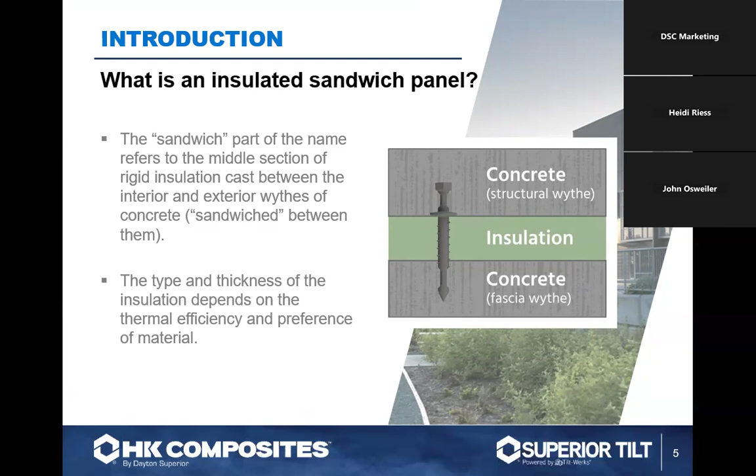So when we talk about sandwich panel, we're talking about two layers of concrete. We call them wythes, with insulation in the middle. What's important is that we make that efficient, getting every benefit we can out of it, wringing every economy we can. So the thickness of insulation varies depending on the facility type and what we're doing in there, as well as the actual makeup of the panel itself.

There's really two primary materials in a sandwich panel. There's a few more than that, but there's really two main ones: concrete and insulation. There are no cavities within this wall. This is not a cavity wall system in any way. There is reinforcement in that panel - there's rebar, there may be some wire mesh depending on the panel type. But again, no cavities. This can be a completely finished, efficient, complete panel, even without any coatings.

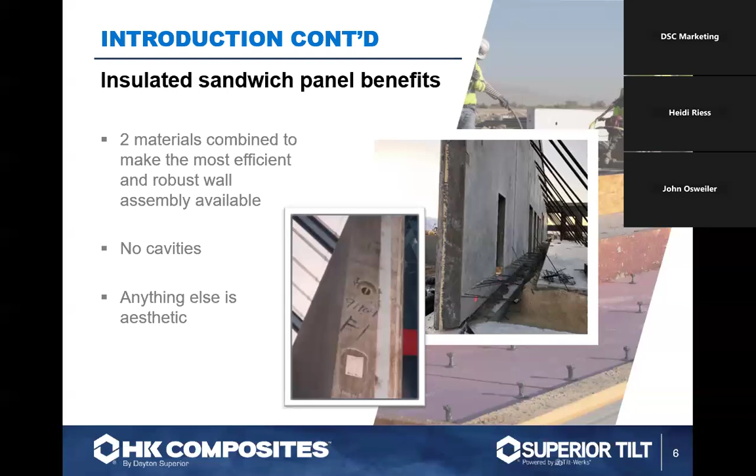This is a barrier type of system, so there's no rain screens, no other waterproofing, no air barriers or vapor barriers needed in most typical panels. That can change a little bit if we get into freezers and coolers. But in this case, it's these two materials, and anything else we do to it, whether it's coating it, thin brick, or any kind of architectural accents, that's just aesthetics.

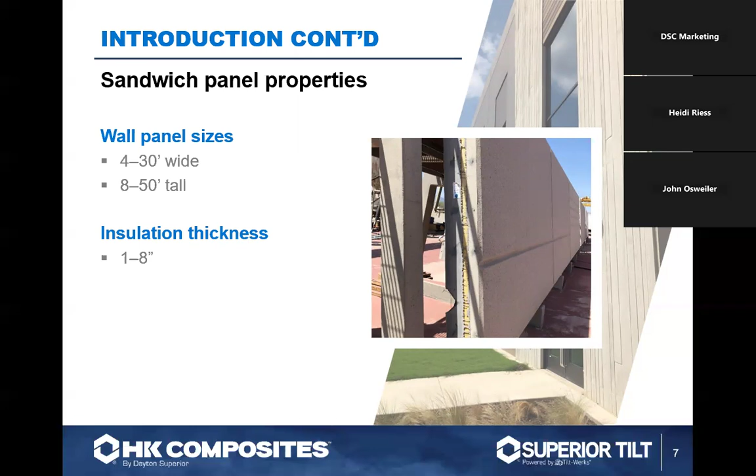So we can do wall panels, sandwich wall panels, really in about any size. It's pretty much the same as what we do with any other type of tilt-up wall panel in terms of sizing. The insulation can be pretty thin, or it can go up to some pretty significant thicknesses if we need it to. These wall panels have two wythes that can do different things.

In most cases, for site cast tilt-up applications, we have this style where we have a structural layer, or structural wythe, that's the load-bearing wythe. It is almost exclusively on the interior side of the facility - you'll see why we do that here in a couple of slides. And then we have a non-structural wythe, which is the face. That face can be as thin as 2 inches if we really want it to be - it could even be thinner, but typically it's around 2.5 to 3 inches thick. That non-structural wythe, that face, isn't doing anything except protecting the insulation and making it look the way we want it to look.

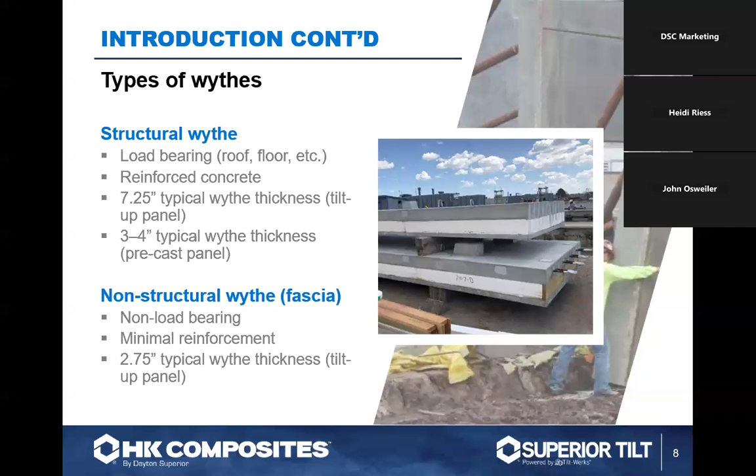So we can do this a couple different ways. Precast, obviously, is done at a precast plant. Oftentimes it's under roof - you have a lot of factors that can complicate things that are taken out of the equation when we do precast. Those panels are cast on beautiful steel beds. They can vibrate, they can be heated if we need them to be. They'll batch the concrete in the plant, and then those panels are shipped to the site on a truck.

And then we have the tilt-up, of course, which is site cast on the facility floor if we're lucky. Most of the time, we like to cast these panels right where they're going to be tilted into position. Doesn't always happen that way - sometimes we need to cast them a little ways away and walk them with the crane to their final tilted-up resting place.

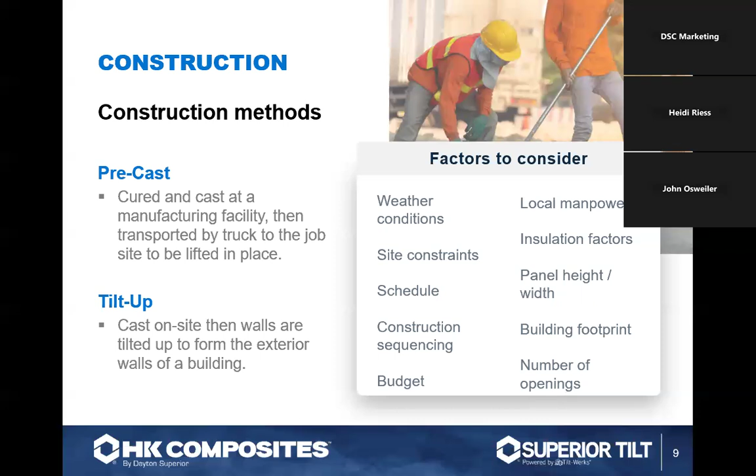Any type of facility can be done this way. Right now, probably in terms of total square footage, we're doing so many data centers that it's really pretty remarkable. But we can also do just about any other type of facility, from correctional to office spaces. It's amazing the architectural things we can do on these, not just the big box gray warehouses that you might typically think is what we're limited to.

The structurally composite panels are a little bit different, in that we have the two layers, the two wythes of concrete, acting together to bear the load.

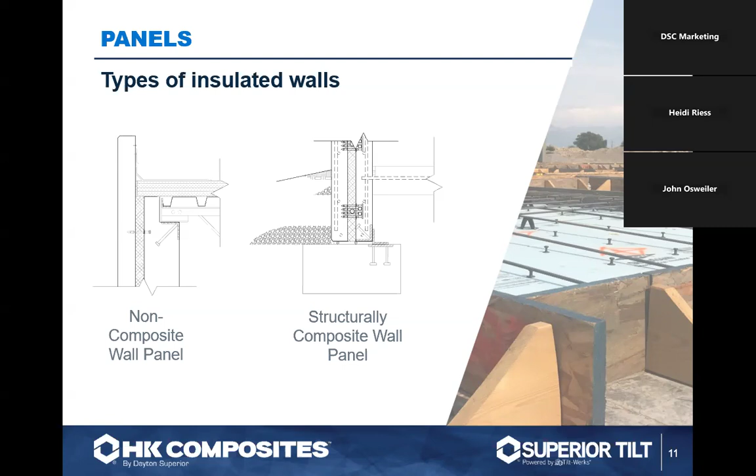So we need a connection system that is both non-conductive, thermally efficient, and that can handle those loads at the same time. We save concrete thickness when we do it that way.

So the non-composite panels have the structural wythe. These wythe connectors you see on the bottom right are made specifically for non-composite panels. They allow the face to expand and contract and move relatively independent of the structural wythe.

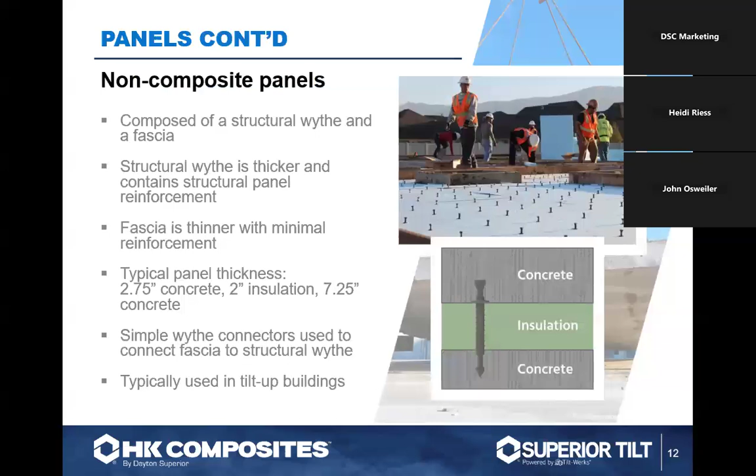On composite panels, we have to have a connection device that's significantly stiffer and stronger so that we share that load between the two.

The reason why this is important: on a typical non-composite panel we may have, let's say, an 8-inch structural withe, and then a 3-inch face out there, that's 11 inches of concrete. We can very easily do the same thing with maybe 2 layers of 3 or 2 layers of 4, so we can do with 8 inches of concrete on a composite panel what we're doing with 11 inches of concrete on a non-composite panel.

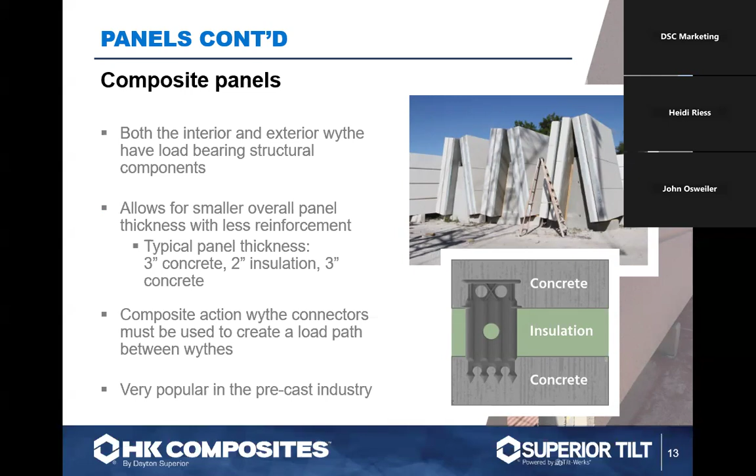There's pluses and minuses to both of them. This is almost exclusively used—not exclusively, but the precast industry almost exclusively uses the composite design of panels.

When we get into the tilt up side of things, that's where we start to see we're kind of sharing things. No matter what style of panel we're doing, composite or non-composite, what we're looking for is monolithic insulation. We're trying to avoid any thermal bridges across that panel. The connection devices do that in and of themselves.

So we've got 3 connectors that we're looking at here: a composite, non-composite, and then the delta tie, which can actually do both. We're looking for insulation to go all the way to the edges of the panels, all the way to the edges of openings, whether that's windows or doors or whatever it might be. And that's going to give us a lot of benefits down the road here.

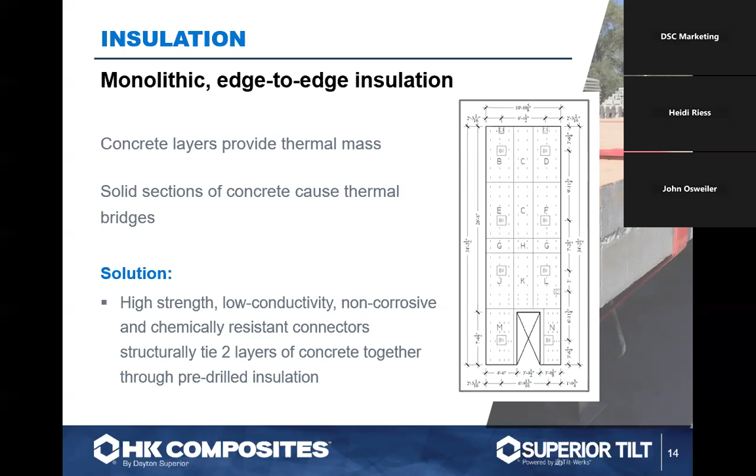We'll show you why this is what we're trying to do. So when I say edge to edge, I literally mean that. The edges of the panels, we dead end the insulation all the way to the edge. You'll look at the roof parapet detail there. This is really important.

A sandwich panel makes it relatively easy to match up the insulation, let's say from the roof to the wall, and really have that total envelope insulated, where we don't have spots where we might have thermal migration or vapor transmission through that panel.

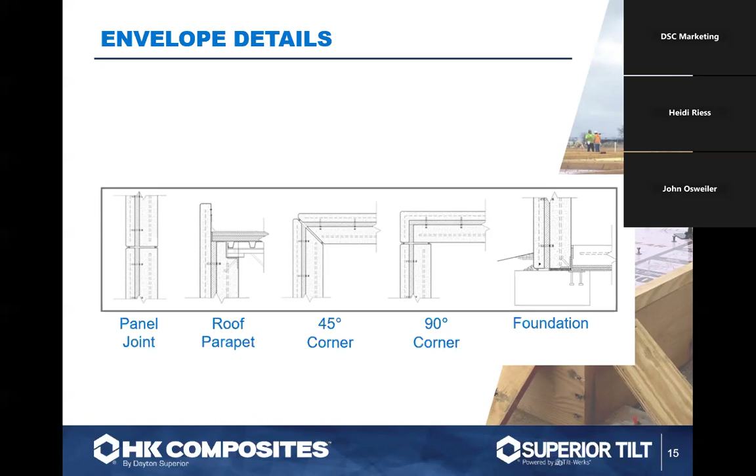So you're just looking at a couple different indicators of how we go about doing things. These are really simple ones. Some of the details can get relatively complex, but we're here to help design those.

Let's just say it's Phoenix. In the morning in Phoenix, you get that east sunrise, and it very quickly heats up the east side of the building. Now you've got those faces that want to move quite a bit, but the other side around the corner isn't, and we have a lot of differential movement there, in addition to just a lot of movement in general. So that's why we want to detail these things correctly, to let those faces do what they want to do due to thermal expansion, and yet...

We have a solid panel. We're thermally isolated from that outside, and it just gives us a lot of other advantages too.

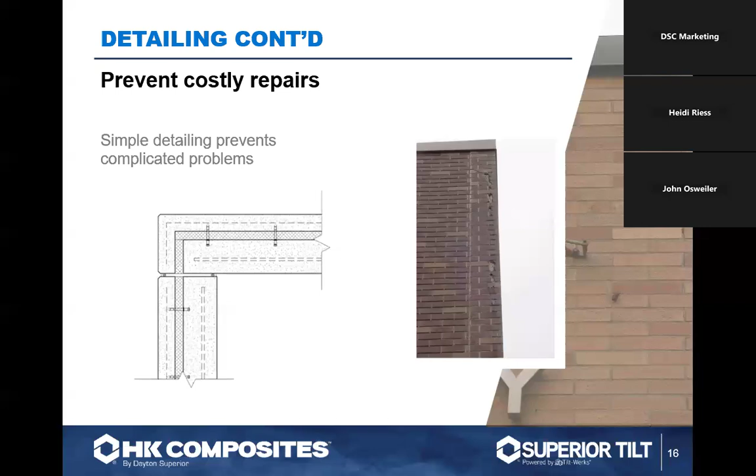When we're placing the concrete, we're trying to avoid a few things. Like I said, solid sections are a no-no if we can avoid them. It seldom happens, but sometimes we have to have a solid section somewhere, though it's pretty rare.

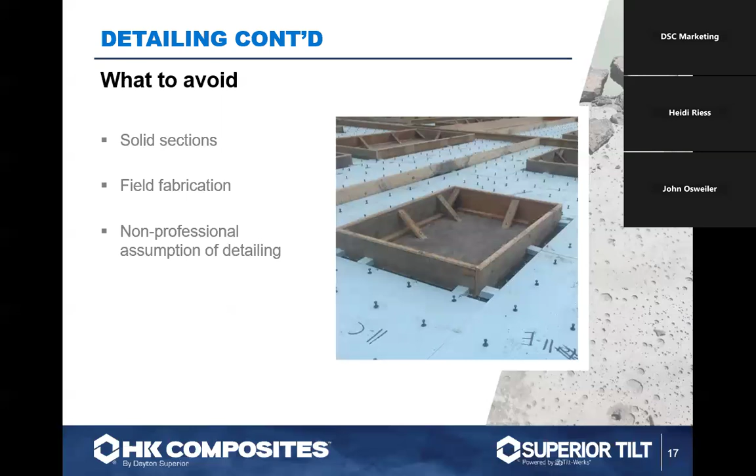We also want to make sure that you take advantage of what HK and Dayton can do in terms of design of the insulation system for each panel. So let the architect and let us determine those details. We'll cut it for you, we'll fabricate it. You get it on site, and you don't have to make any of those decisions.

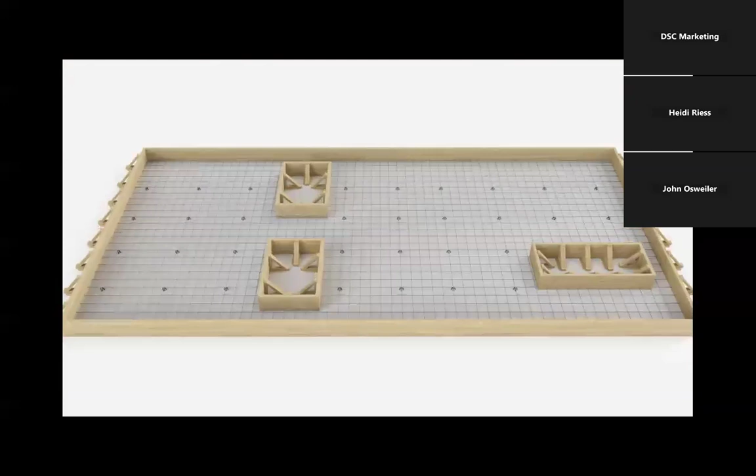Or I'm sorry, the face of the panel. This is wire mesh, I got that backwards. So that's the face, let's call it 3 inches with wire mesh in there.

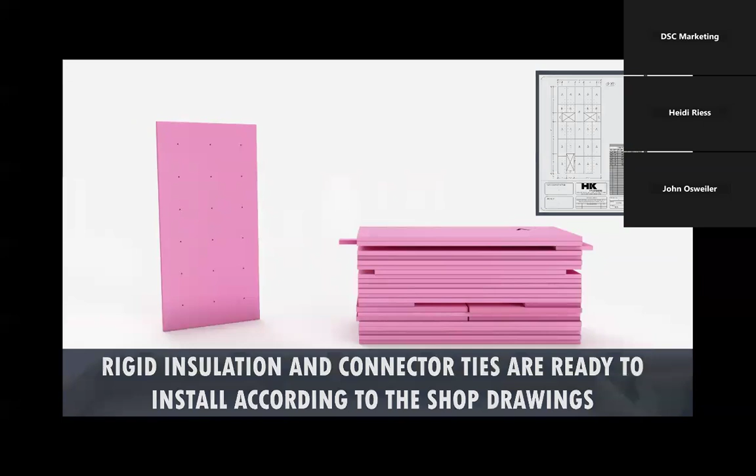And then the insulation goes down. It's already cut, it's already fabricated. They just kind of lay it down, kind of a paint by numbers kind of thing. Just every sheet is labeled, and you have a map of where those go. They've already got holes in them for the connectors, so nobody has to think about where they go. You just stick a connector in its spot, and you're good to go.

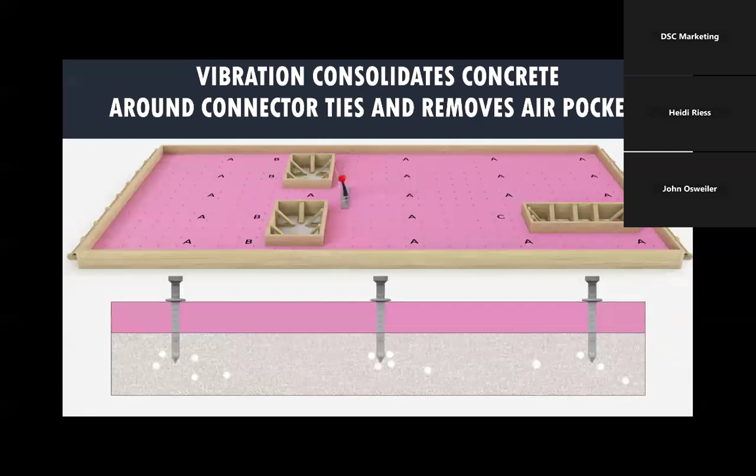Once all that's down, then we lay the reinforcing steel, because now this is going to be the structural wythe that's getting poured. What you're seeing here is we do some vibration to make sure we get good consolidation of the concrete in those connector embedment areas.

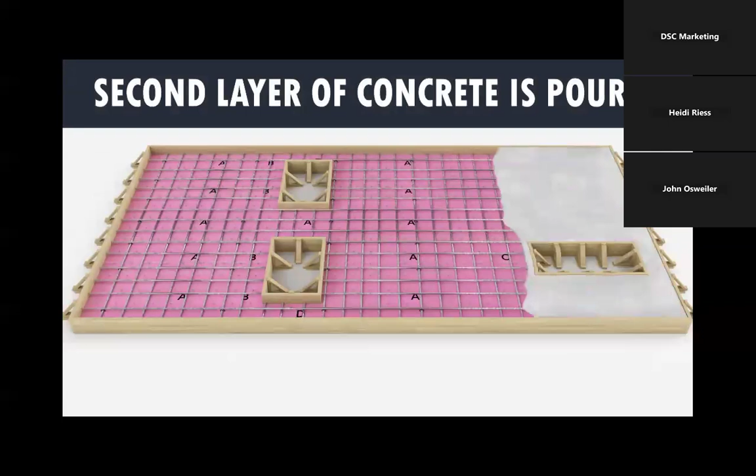Down goes the steel reinforcement, again, structural layer. So this does have rebar in it, just like any other solid panel would. And then we're done. So the lifting inserts are in place, brace inserts are in place, and then just representation of the panel getting put into place.

These may not be done right and exactly where they need to be. We may have to have a sacrificial mud slab somewhere off the site. If we're doing, let's say, a school where you have a lot of stub outs for plumbing and all kinds of different things, maybe the slab isn't a place where we can pour panels. Well, we can do them somewhere else. We can stack cast them. We can do lots of things to make it as efficient as possible.

Then I've been talking about 2 different systems, composite, non-composite. There's a couple different ties for that. Chuck's going to talk a little bit here about the Delta tie, which has been part of Dayton Superior for quite some time. He's got a lot of experience with that. So I'll turn this part over to Chuck.

Thank you, John. So with the Delta tie, it was originated originally by Dayton, especially in the mid 1990s. And what you're seeing is this is a non-metallic, geometrically configured 2-dimensional truss system, which basically is basically a monofilament strand embedded in an epoxy material, alkali resistant resin.

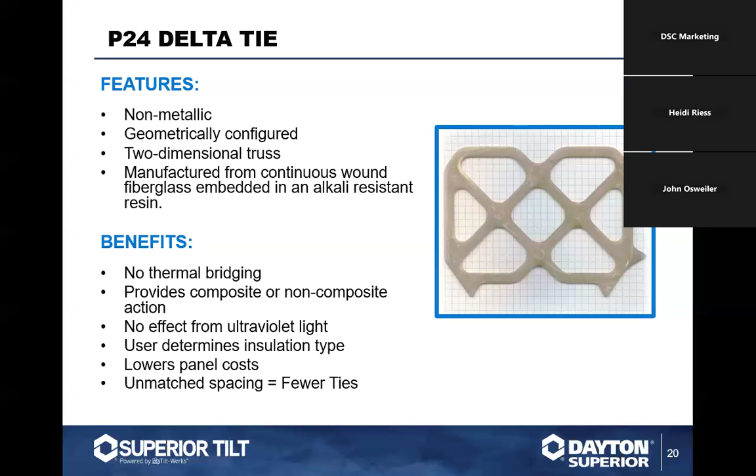And we typically have two sizes. The standard size for insulation up to 4 inches is the 5x7. Basically, you are required to have 1.5 inches embedment, whether it's in the facial wythe or the structural wythe. As John explained earlier, what those wythes were, it's basically the layers. So you basically need to have 1.5 inches of embedment in either side.

And then because of the freezer structures, etc., there's a lot of structures coming out with some 5-inch and 6-inch insulation, even up to 8 inches of insulation. We had to develop what I'll call a superior delta tie, which is basically just a bigger one. It's 9 by 11 inches, and once again, it's all graded on how much insulation you have as to which size you actually are going to be determined, and also the orientation of the anchor.

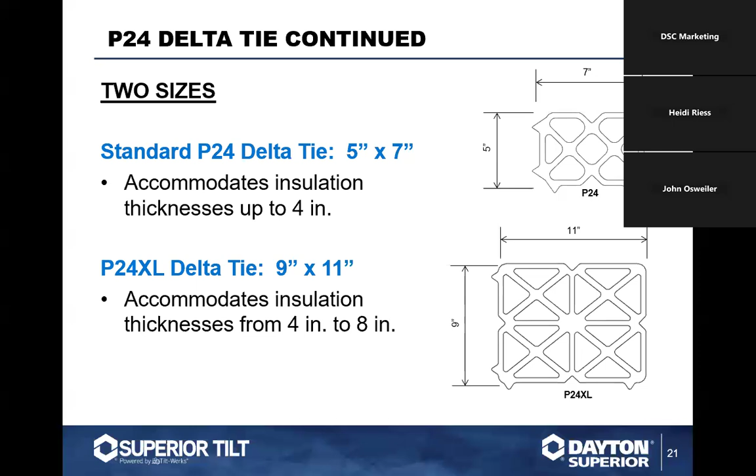As I talked about the orientation of the anchor, it's designed primarily just to get that 1.5 inch embedment. So for up to 2 inches, you can lay it on its 5-inch side down. When you come to a 7-inch side down, and if you have to turn it up from 2 inches to 4 inches, you just turn it 90 degrees and use it in a vertical position. The spacing remains the same.

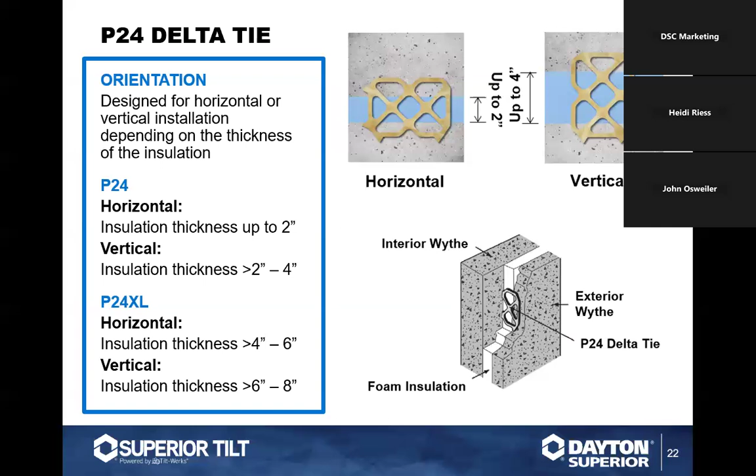And the same thing would be for the XL version. So, installation on the delta tie is very similar to that of the HK tie system.

Basically, you're going to pour your facial wythe, which is usually poured face down first, because the outside of the building is typically always poured on your casting slab. You then apply the insulation in place, and then come in and slide the delta tie into the joints between the sheets of insulation, and you're going to basically muck it in to get your 1.5 inches of embedment into the concrete.

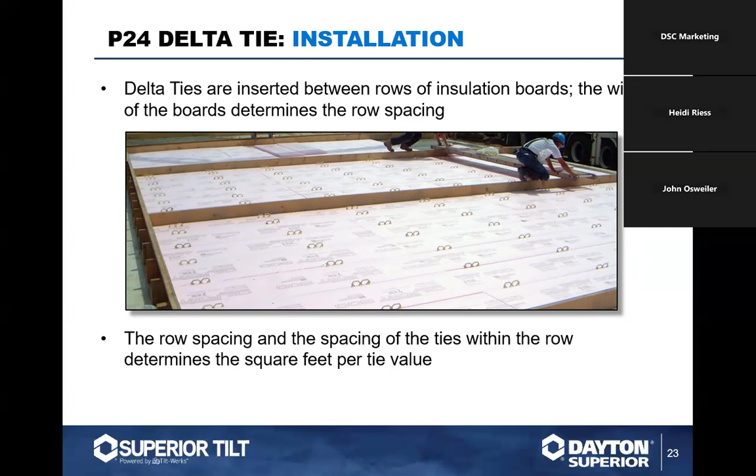Once you're done with that, you can actually then move on to your next row. But typically you are getting the same type of mass wall effect, whether it's the HK or the delta tie.

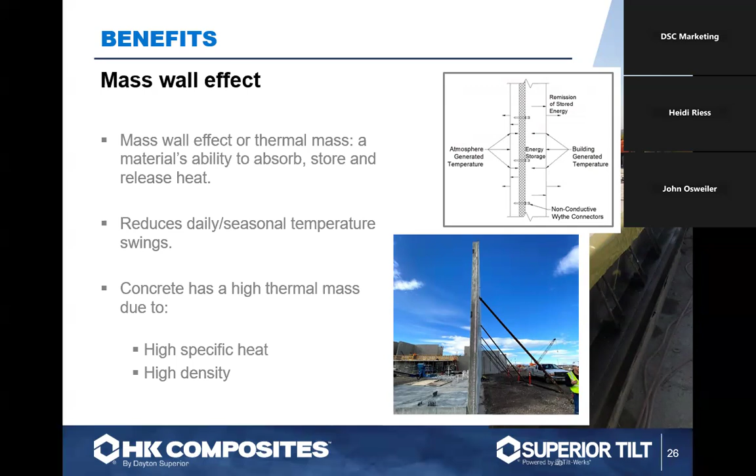Thanks, Heidi. Yeah, so you can see there's a lot of similarities between the two, or between the three types. The delta tie allows, depending on spacing and configuration, for its use in both composite and non-composite panels. But like Chuck said, in the end we get the same thing: a thermally efficient wall where that mass is isolated on the interior, and that gives us great benefits.

But also, when we use lesser tie systems, a lot of times engineers will have to engineer in solid sections, let's say around openings or at bases of panels, at the parapets, that kind of thing, because they just don't have the strength in the ties to do everything they need to do, and that causes problems as well.

So when we have that thermal bridging, we're really wasting part of what we're doing by insulating those panels. When we have that thermal bridging, we also have other things that happen, like condensate formation inside the building.

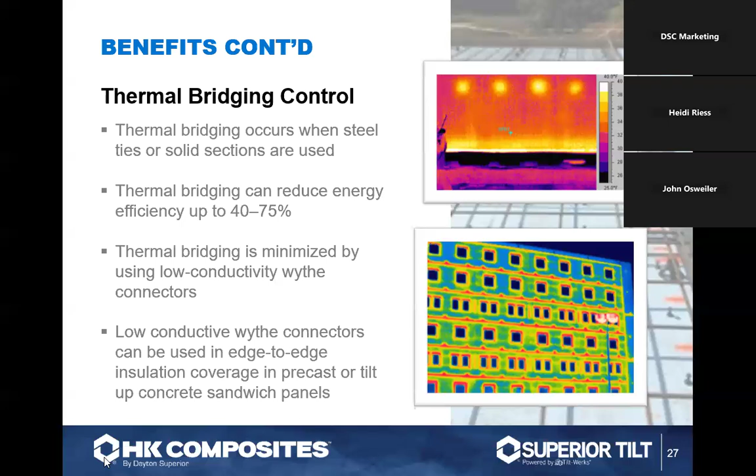That's a pretty big issue. We've also seen that happen in panels on hospitals and stuff like that. So it's a big problem. It's not just energy efficiency, it's not just controlling cracking by letting the face move. It really is about much more than that. And water condensate is a big enemy to any construction method.

Every project we do, we can also show you a dew point analysis of that particular panel for that particular facility in its area where it's being built, so we can give you an idea of where that dew point is going to lie.

Little secret here: even though we do typically much more than 2 inches of insulation, as this industry has progressed we're seeing more and more insulation because people want even more efficiency. But the little secret is 2 inches of insulation in a typical non-composite panel works quite well in just about any part of the country, and I'm talking from Alaska to Florida.

We can do a dew point analysis and show you that it performs pretty well, actually very well, in any part of the country. You could take the same panel from Maine to Alaska to Florida and have no issues due to vapor drive or anything like that.

Once we get into low temperature facilities, that all changes quite a bit. But hey, that's how efficient these are.

Don't mean to interrupt, but I do have a question. With the fascia panel being encapsulated with forming around the edges and the foam insulation on top, are there any differences in curing and strength gain between the fascia and the structural panels? Do you want me to repeat that? Isn't that a good question? It's from our chemical guy, so I hope so.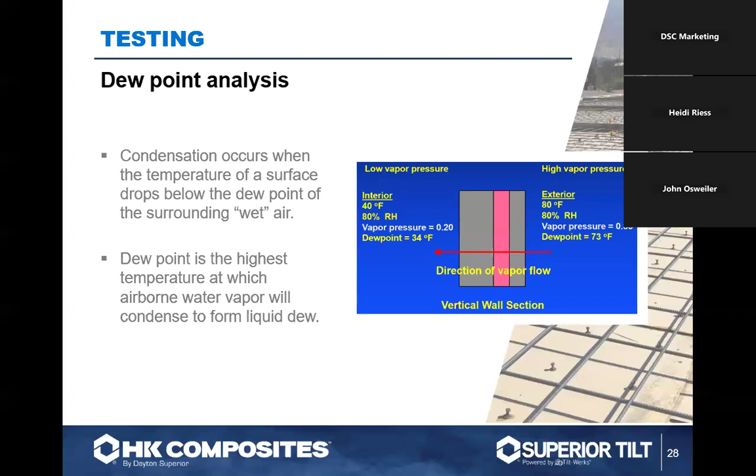Yeah, work for me here. There we go.

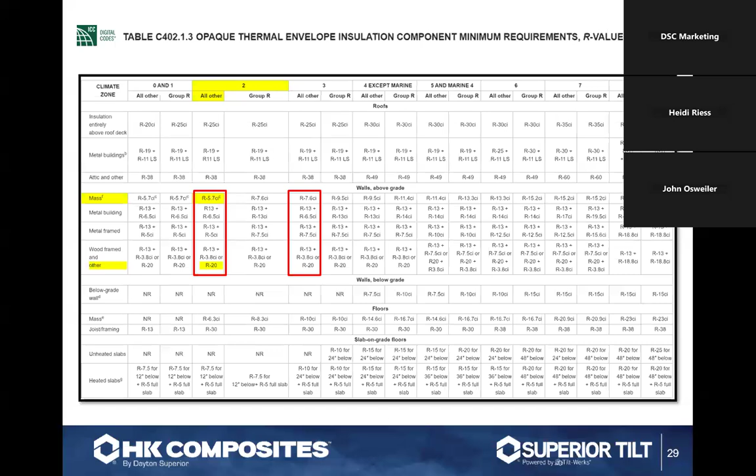It's also an incredibly tight facility. You have no wind intrusion, no rain, you don't need any of those additional things because this panel is such an effective barrier system. You can look at the different zones as things change a bit, but continuous insulation is very effective when combined with mass. Anything else needs both, something between the studs plus continuous insulation in addition to that. That's hard to do in a lot of different facility types.

Whether it's Delta Tie, HK Ties, we can give you everything you need for those panels, tied up in a bow. We'll give you layouts for the insulation, we'll fabricate the insulation, and you'll get that in addition to the Dayton lift and brace drawings, the reinforcement plan, all that kind of stuff. We can help with that and put it all together for you.

We'll do the dew point analysis. We'll also help; we have our own engineering staff, of course, and they can help the designer or builder with any specific issues they might have, whether it's special details we need to work up for special conditions.

We're there to help, and it's really important to us that these things go very successfully, because if something happens on site, we are usually the first ones to hear about it, and we are the ones that are looked for solutions. So we'd rather have everything go perfectly from the get-go. In addition to that, we like to be on the site when these panels are cast, just to make sure everything's going pretty good. We always remind people that we're casting in something where those ties have to be consolidated very well, and timing is an issue. So maybe we need to think twice about what the delivery schedule for the ready mix trucks are, that kind of thing. So we're there to help. We have plenty of people to affect that help, so please use us in that way.

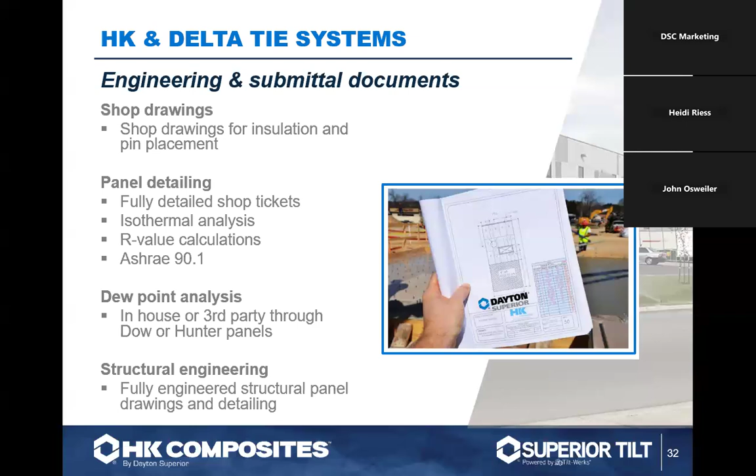So most of the insulation, the majority of it, is extruded polystyrene, which is extremely hydrophobic and really doesn't take on moisture from that application. Liquid moisture just really doesn't infiltrate the panel or the panel insulation. There are some other insulations we use, like polyiso. We have to be careful about how we use that, that it has the right laminates on it in order not to take on moisture. But where insulation and moisture typically start to cause problems is from vapor drive. That can inundate some insulations with high humidity inside, and then give problems if it doesn't have the ability to dry. But the casting process is not an issue in terms of taking on moisture within the insulation.

And the other question had to do with curing—I can't remember. Are you there, John? Yeah, can you hear me? Okay, yeah, sorry, I think I cut out. Sorry, I forgot the second part of the question. I apologize. Oh, no, no, no. Let me see here, we actually got a couple. I'm so excited. Um, the second part is, does the insulation material matter?

Oh, yes and no. The primary reason it matters is there's different R values per inch in different insulations. Extruded polystyrene is typically an R5 per inch. Polyisos are going to be anywhere from 6.5 to 7.5 per inch. So it kind of depends on what R value we're looking for. Cost is a factor too. Expanded polystyrene, the beadboard type of stuff, has a little bit lower R value per inch, but it's less expensive. So there are times when we really care—if we're doing freezers, for example, my concept is that we want as hydrophobic a type of insulation as we can get. That would be extruded polystyrene, but we use all three types—expanded, extruded, and polyiso—in projects all the time. A lot of time it comes down to just what we need for R value. Is it advantageous for us to use a polyiso, let's say, and cut back on the thickness for the same R value or not? It just kind of goes. A lot of times it also depends on what the architect has specified in that panel.